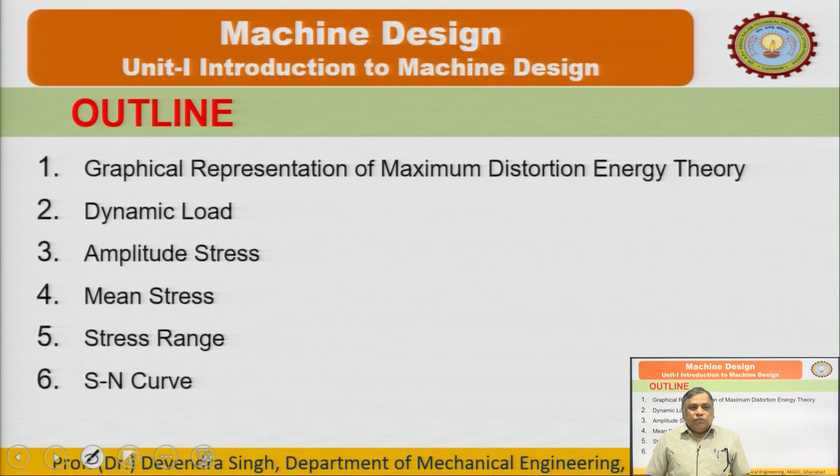Finally we will try to cover the determination of the endurance limit, because in static design we were considering the failure stress: for our ductile material it is the yield point in tension, and for brittle material the ultimate tensile strength. Against dynamic load we consider a new strength, called the endurance limit or fatigue limit or fatigue strength. If these also have some specific meaning, we will discuss that when we talk about dynamic design or design against dynamic load.

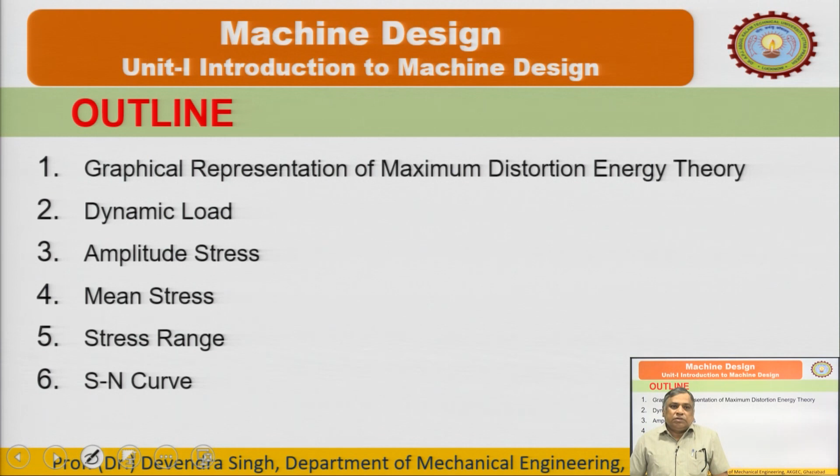So the graphical representation of von Mises theory, or the maximum distortion energy theory expression: this is the sigma 1 sigma 2 plane, O is the origin, and the expression for biaxial state of stress is the expression for factor of safety 1, and this is the equation of an ellipse.

So where this ellipse intersects the sigma 1 axis and sigma 2 axis, we just put sigma 1 equals to 0 and sigma 2 equals to 0 in this equation. We can find out the points where it will intersect.

So if we want to get the points where this ellipse intersects the sigma 1 axis, we need to determine the coordinates of that point. So we just put the ordinate value as 0, that is sigma 2 equals to 0, and find what sigma 1 is. Sigma 1 equals to plus minus s y t. As you put sigma 2 equals to 0, that term becomes 0.

Sigma 2 equals to 0, sigma 1 square should be less than or equal to s y t square, so sigma 1 is plus minus s y t. So the coordinate is s y t and 0 — I haven't written the 0 here. So it intersects at s y t, which is the yield point in tension.

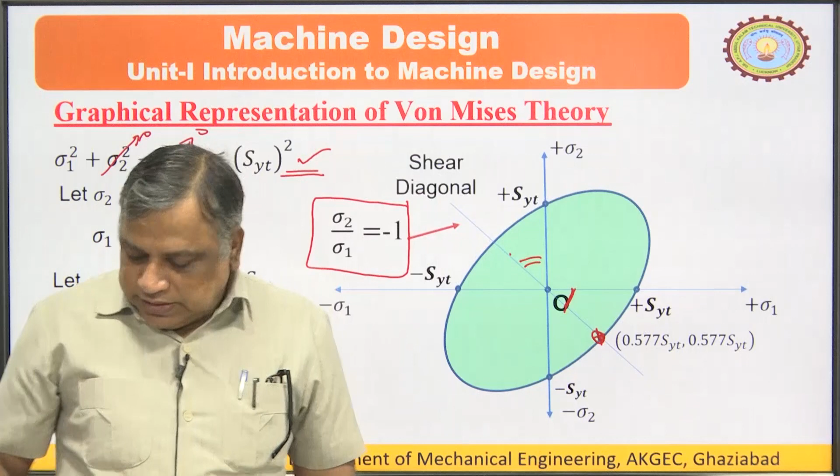This is the shear diagonal. So we can say according to the maximum distortion theory, the shear stress at the yield point will be the maximum value, that is 0.577 times SYT. Similarly we can determine it by the maximum shear stress theory. So this is the safe zone, and this was the yield point shear stress according to maximum distortion theory.

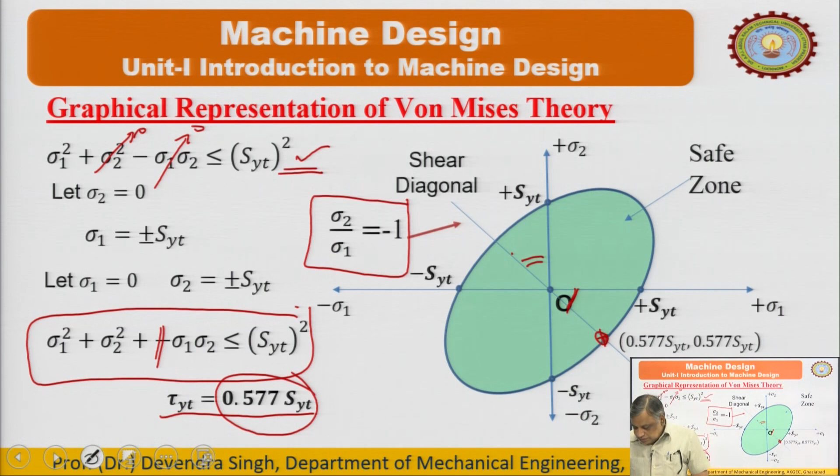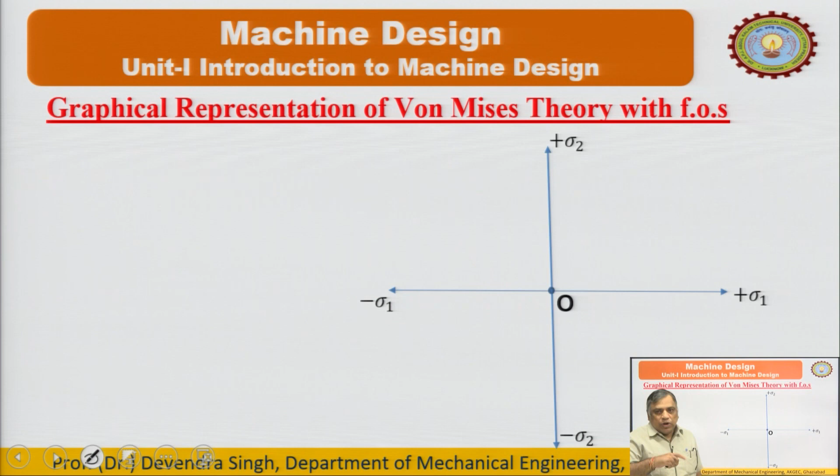Now, if we include some factor of safety, we will use SYT upon FOS on the right hand side, and the equation will become this, this is the only change.

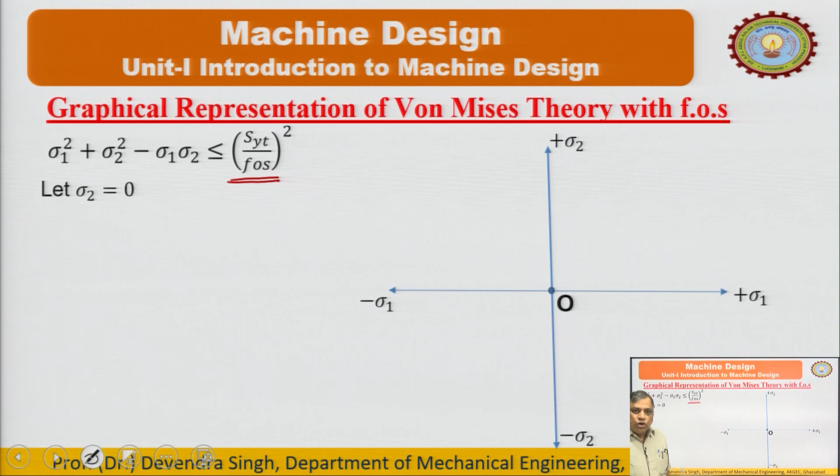Now again, sigma 1 and sigma 2 are the principal planes. This line represents the shear diagonal, and the equation of the shear diagonal is this. If we solve this and this, we will get some value for this point.

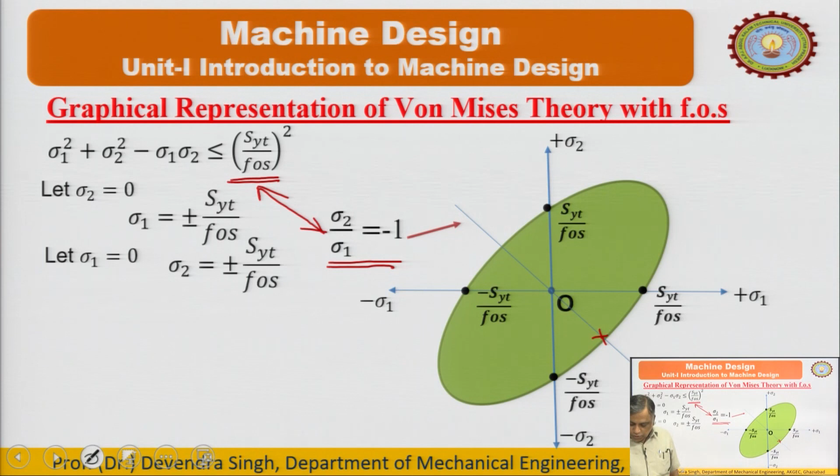Now this point is 0.577 times SYT upon FOS, because we have included the factor of safety. So this is there.

Now this bigger one is the ellipse represented for factor of safety 1. This is the equation, and now we have incorporated some factor of safety.

So this red zone will be considered the danger zone for factor of safety 1, and the safe zone for the factor of safety is the greener zone.

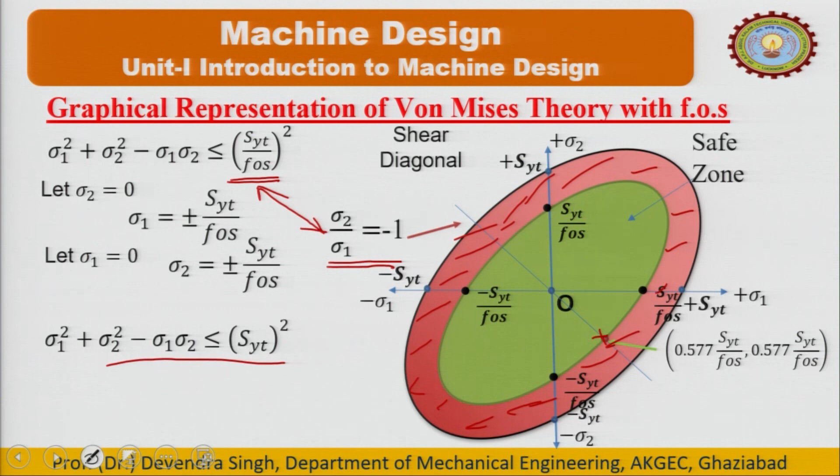This is the safe zone. Now if we want to compare various theories of failure, again sigma 1 and sigma 2 are the two planes, and these are the points SYT with factor of safety 1.

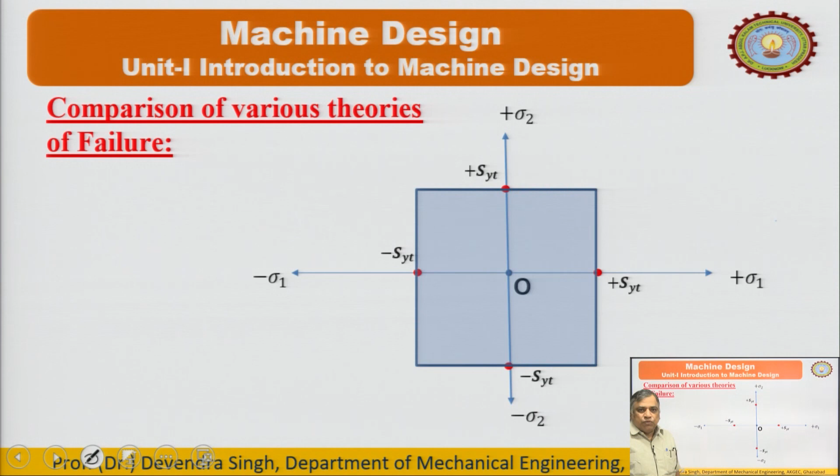This is the representation of the maximum principal stress theory, which we discussed in the last lecture. Now this is our maximum shear stress theory. Now this is our maximum distortion energy theory. So this is the shear diagonal.

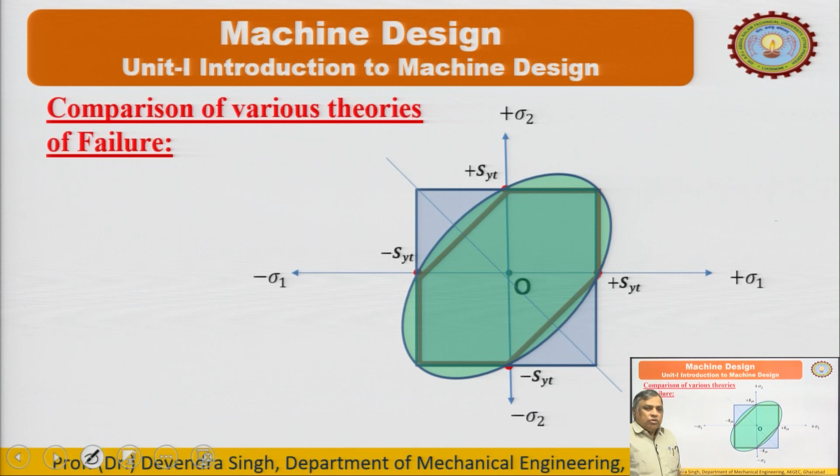So according to the maximum principal stress theory, the shear tau yt equals SYT. This point is 57.7% of SYT, and this point is 50% of SYT.

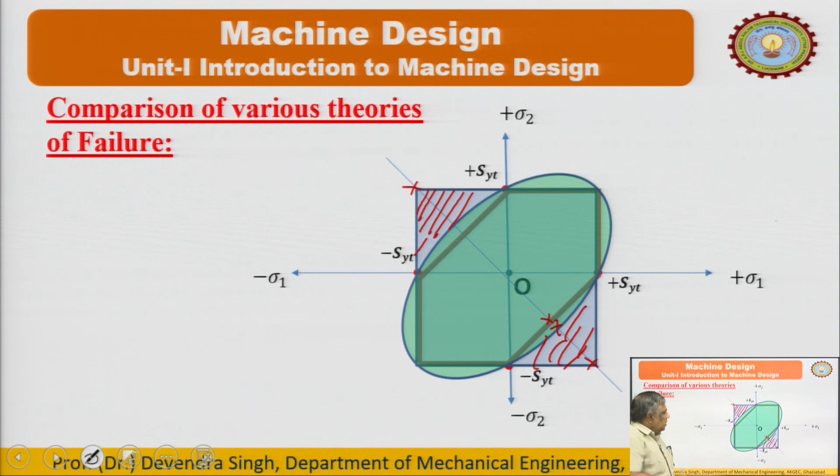Here, if we consider the opposite nature of stresses, this is the unsafe zone according to maximum distortion energy theory and maximum shear stress theory. And maximum principal stress theory says this is a safer zone.

So whenever the material is subjected to the opposite nature of stresses, then we do not use maximum principal stress theory, and also in the case of brittle materials.

Now this is our ellipse for the maximum distortion energy theory. So among the three, the maximum shear stress theory is the most appropriate theory and will give the most conservative or safest design, and it gives the result directly.

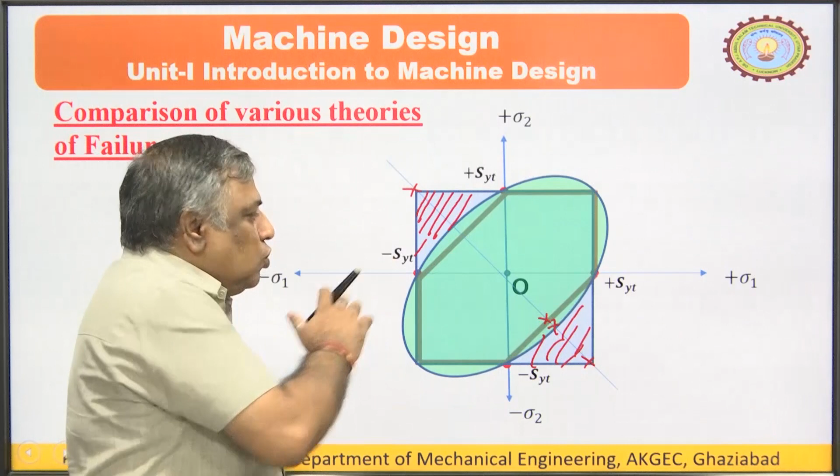So we always use the maximum shear stress theory for the design of components made of ductile materials, and the maximum principal stress theory for brittle materials. But we should always consider what type of stress the material is subjected to, it should not be opposite in nature.

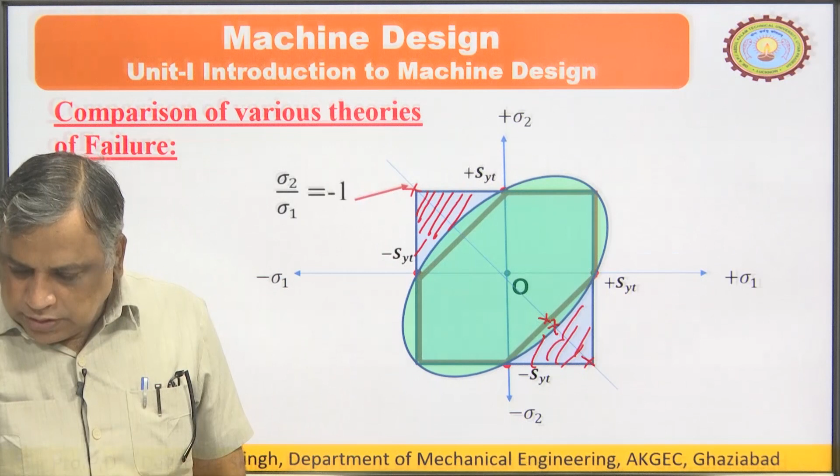So this is all about the theories of failure that I have discussed. Now design against static load is over, and the next topic we are going to start is design against dynamic load.

So first of all, what is dynamic load? Load or force which either varies in magnitude or changes in direction with respect to time is called dynamic load. So here the magnitude is varying with respect to time, so this is a dynamic load. It may be like this, tensile, or negative.

So it may be like this, it may be like this. This is also a dynamic load. It is changing the magnitude as well as the direction or the nature. For some time it is tensile in nature, for some period it is compressive on the negative side, then again it will go to tensile. So this is a dynamic type of loading.

In mechanical engineering, most of the elements are moving, so the load on mechanical components is always dynamic in nature. We should learn design concepts against dynamic load seriously, and understand what kind of stresses get induced due to this dynamic load. For design purposes we will discuss this. There are many types of stresses you can think of, but there are three in my opinion which I should discuss.

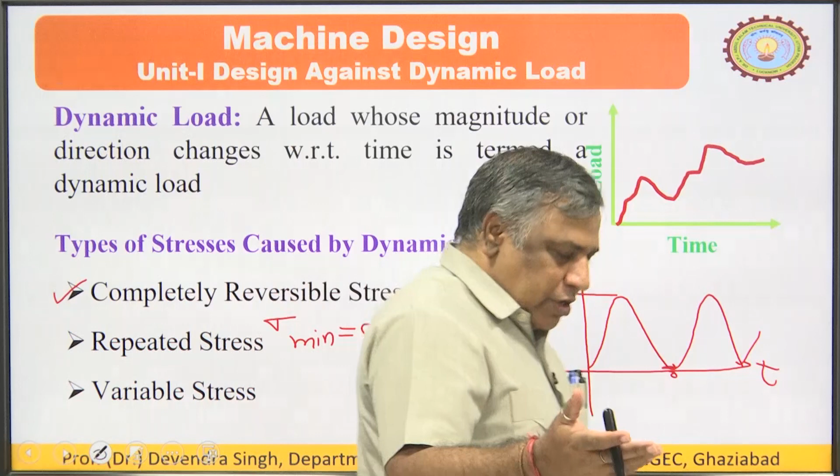And variable stress, it may have any kind - if I convert this, this is called the variable load. It may go to the negative side also.

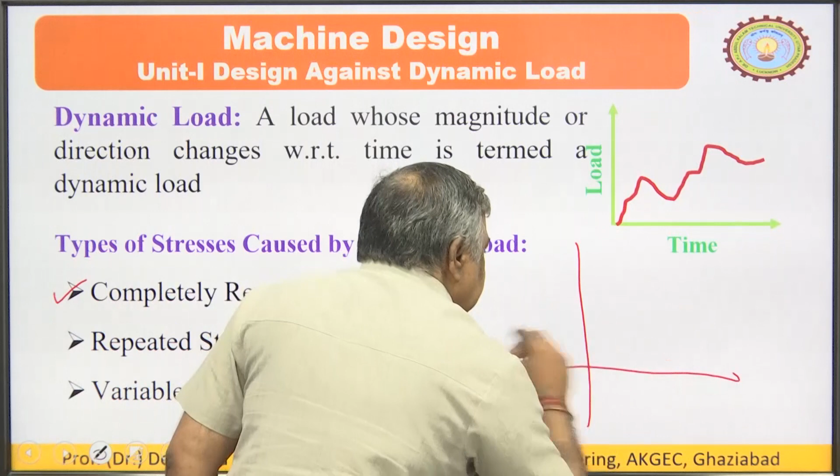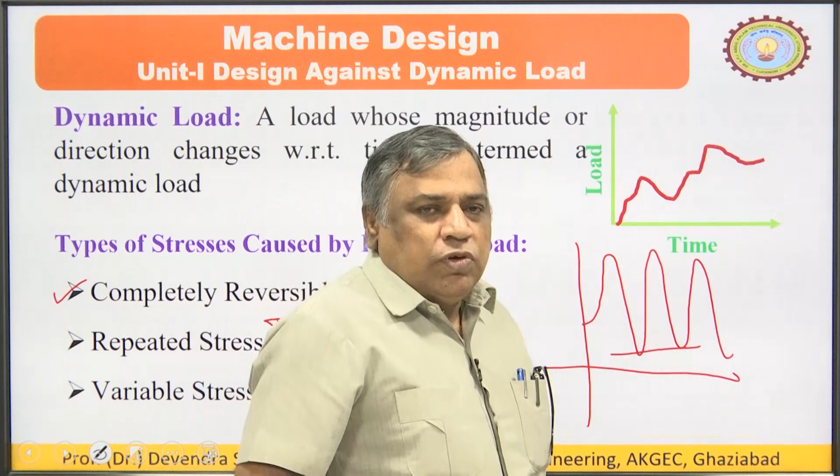This is variable stress. So these are the three types.

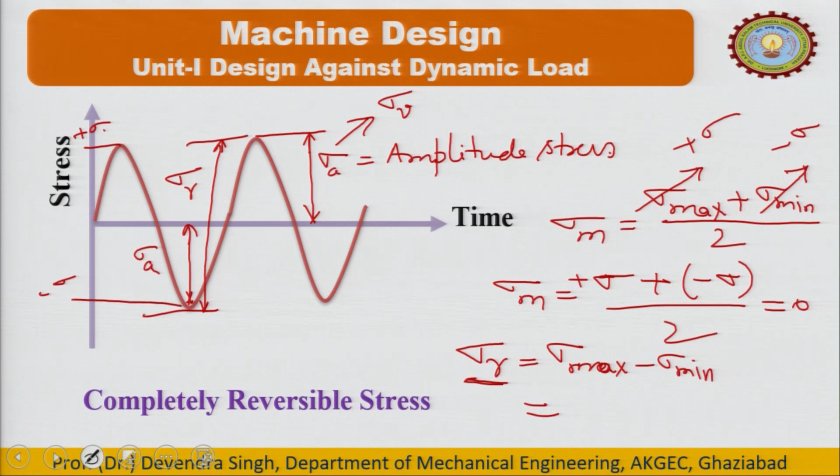This is the mean stress, and third is range, that is stress range. So stress range is the difference between maximum and minimum, that is called range. So here the range becomes plus 2 times of sigma. So in this way we will calculate amplitude stress, mean stress and stress range, and these are the quantities which are of our interest during the design against dynamic load.

This is repeated stress, I have already discussed. I have told before that if minimum stress is 0, then this becomes repeated stress. Here let's look at amplitude stress, sigma a.

Sigma max minus sigma minimum divided by 2. According to this curve, sigma max is plus sigma, sigma minimum is 0, and sigma a is sigma by 2. That means if I compare completely reversible stress with repeated stress, the magnitude of amplitude stress becomes half compared to completely reversible stress.

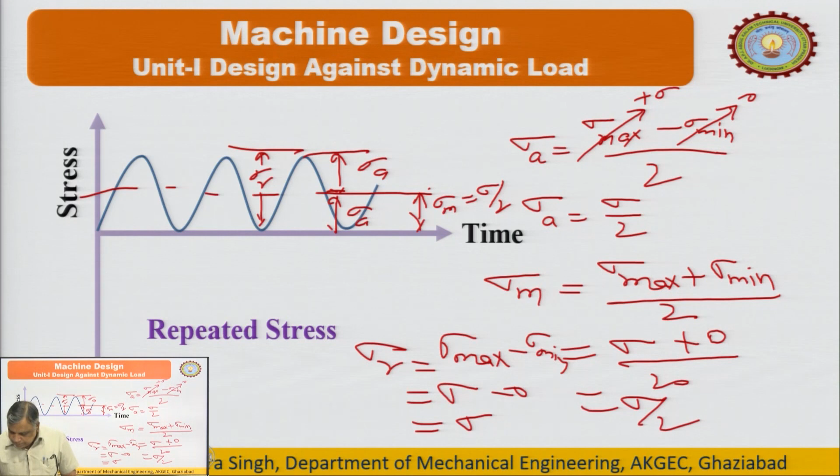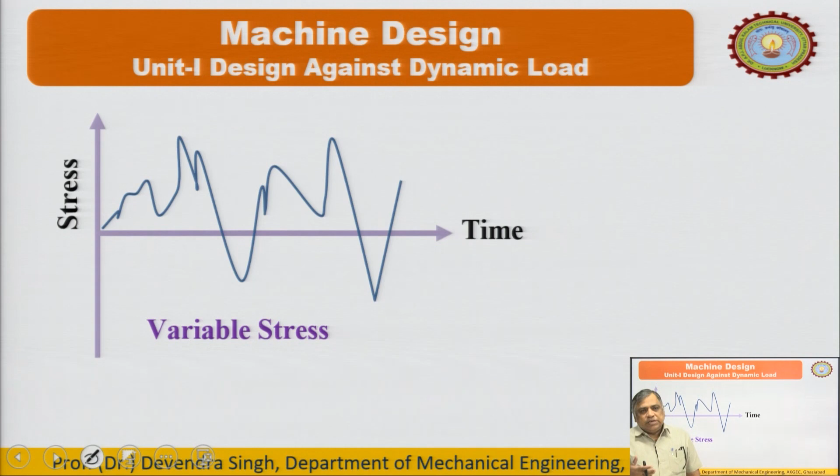Then what is fatigue? Fatigue literally means exhaustion. So if any material is not able to take up load further, then it is termed as the material is under fatigue, and the fatigue failure is very interesting.

Until now we understood that material fails after going beyond SYT and SUT, but in fatigue failure, if a material is working under completely reversible stress, if it fails, it may fail in 90% of cases even below the yield point, and without any warning, that kind of failure is called fatigue failure. So when the material is subjected to fluctuating stresses or fatigue stress...

So here you must remember, fatigue stress is completely reversible stress. In completely reversible stress, material fails below the ultimate point, and in more than 90% of cases below the yield point without any warning, this is called the fatigue failure.

Then the fatigue failure mechanism, if we discuss, this is there, I have written already. So fatigue failure mechanism, it constitutes two steps, it can be explained in two steps. First step is initiation of crack and then propagation of crack.

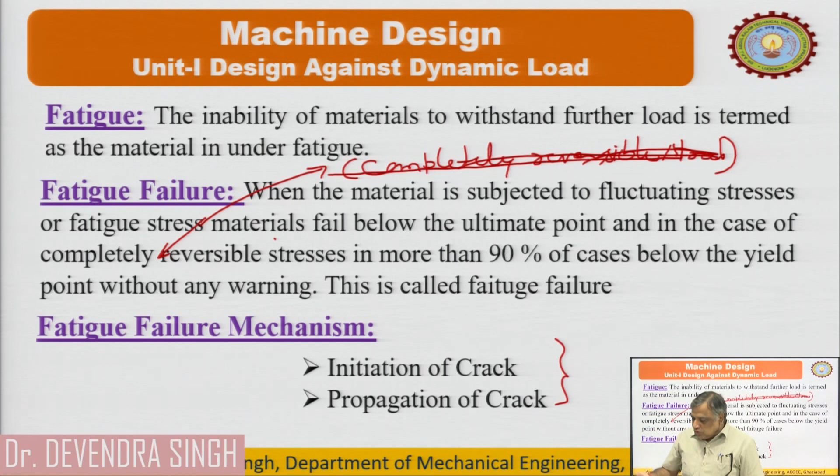Crack initiation and crack propagation will result in the reduction in the cross section or area, and F upon A. If A is reduced, then the magnitude of stress increases without any warning. So I will discuss the mechanism as well as the S-N diagram to determine the endurance limit in the next lecture. So for today...